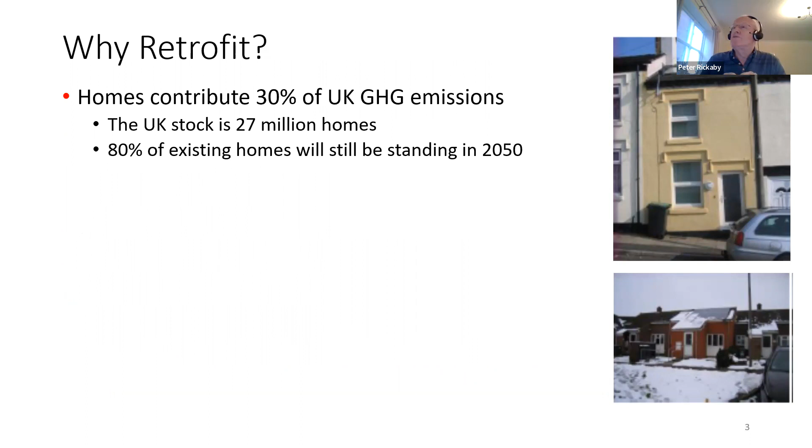But why retrofit? Well, homes contribute 30% of our greenhouse gas emissions in the UK. We've got, at the moment, about 27 million homes. And we're replacing that stock so slowly, about 0.5% per year since 1945, that actually 80% of existing homes will still be standing in 2050.

If we were to decide to electrify all our heat and hot water in all our 27 million homes, in order to provide zero carbon electricity from wind power, for example, or the equivalent from solar or nuclear, we would need 30 times as much offshore wind power or the equivalent as we have now. And it's taken us 30 years to get to where we are now. So multiplying that amount of wind power by 30 in another 30 years is probably not a realistic challenge.

But of course, we wouldn't just electrify heat. We'd use heat pumps, which upgrade heat by a factor, called the coefficient of performance, of 2.5. And that means that actually we'd only need 12 times as much offshore wind power if we used heat pumps to deliver our heat and hot water and removed all the fossil fuel, oil, coal, and gas appliances in our homes.

But actually, even 12 times as much as we've got now over the next less than 30 years is pretty challenging. And the government's heat and buildings strategy only looks at between 4 and 8 times as much. So there's a bit of a shortage there. What we do know, though, is that if we were to retrofit all our buildings, and particularly all our homes, we would only need 4 times as much wind power, which is exactly what the heat and buildings strategy specifies, multiplying the amount of wind power or equivalent renewables by 4 to cover our buildings, and by 4 again to cover electrification of our vehicles.

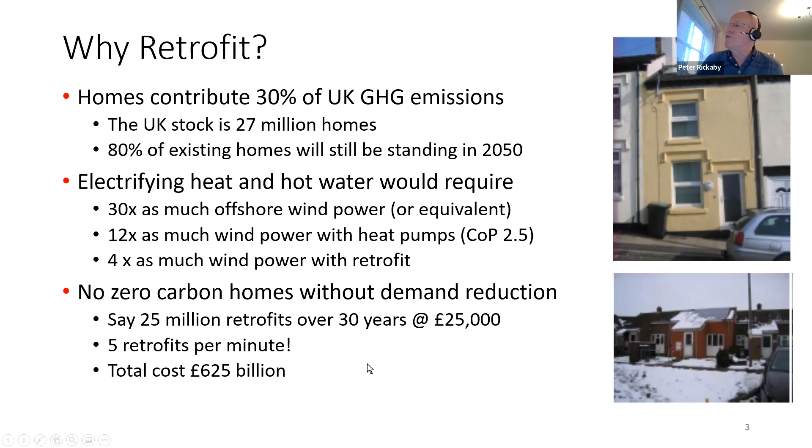But what we found is that one of the main places where retrofit goes wrong is at the corners, junctions, edges, and interfaces. And I like to explain that by saying that anybody can stick insulation on a wall. Even I can do that. But actually, it's where that wall connects to another wall, or a floor, or a roof, or a window, where we can get it wrong, where it's important to get the details right, get the continuity right, get the airtightness right, and so on.

It also goes wrong at the interfaces between the building fabric, the building envelope, and the building services. So is the heating capacity matched to the insulation level of the building? Is the ventilation system matched to the air permeability of the building? And so on. And then finally, and probably most importantly, retrofit goes wrong at the interface between the building services and the people in the building.

If the people who live there don't understand what's been done to the home and why, and what's the best way to use it, and what's the things not to do, if they don't understand what's being done for them, and that may well be an issue with things like heat pumps and ventilation systems, then we might as well not do it. So it's really important that we view our homes as energy systems consisting of the fabric of the building, the services of the building, and the occupants. And we need to be able to interact with all of those.

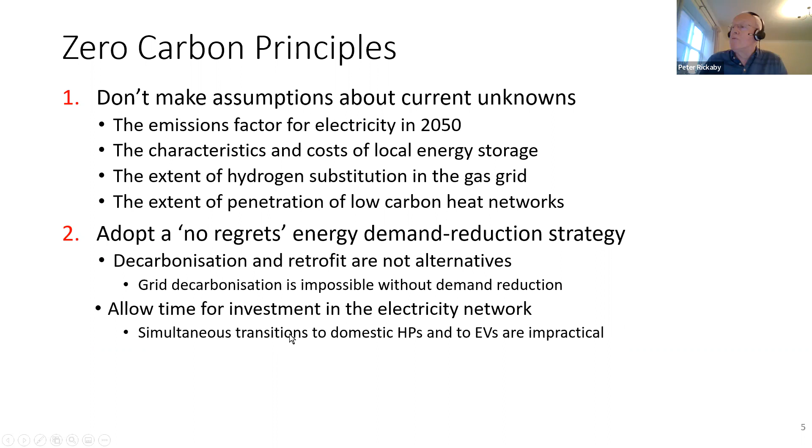So there are some zero carbon principles I wanted to suggest to you. Some more zero carbon principles. The third one is we should really be focusing first on fuel poverty and then on emissions reduction. We tried to work out and sort out fuel poverty in the 1990s. The Labour government made a very good hit at it, but they were overtaken by huge energy price increases in the 2000s. But actually, cold households don't care about emissions.

Some of you may feel the same way, actually. If you're cold at home, you want to be warm, and that probably takes priority over reducing your greenhouse gas or carbon dioxide emissions. So we need to make sure that we deal with the fuel poverty problem. And the events of the last few weeks in terms of energy prices, of course, don't help us with that very much.

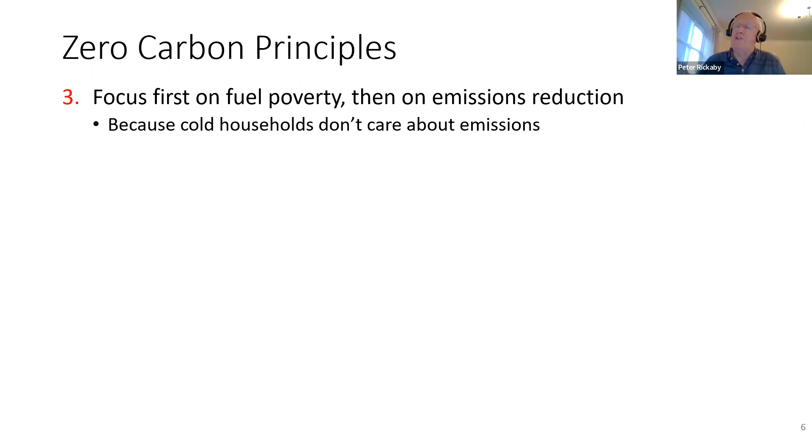So the fourth principle is adopt the fabric first approach. And the fabric first approach, which is long established in the industry, says, number one, improve the building fabric and the ventilation in order to reduce demand for heat and hot water and so on, but principally for heat. And then number two, improve and decarbonize the building services so that we can satisfy the residual demand or the remaining demand efficiently and in a low carbon way. And then three, finally, use renewable energy technologies to top up to zero carbon if the grid hasn't quite got there.

So fabric first is fabric first, and then building services, and then renewables in that order. And it makes sense, because if you insulate the building fabric, the capacity of the building services you need will be lower, and therefore they'll be cheaper. And renewables are actually quite expensive, so we want to use the minimum amount of those for doing our topping up, plus many of them rely on roof space, which we don't always have enough of to do it properly.

So what we should be doing is establishing a staged whole house improvement plan for every dwelling, so that we know how we're going to get to 2050 and which way to do it. Very few householders or landlords can afford to do their retrofit all at once. And so for the rest of us, it's going to be about stage 1, stage 2, stage 3 over the next 30 years, applying the fabric first approach and working at it in the way that one eats an elephant, in bite-sized chunks.

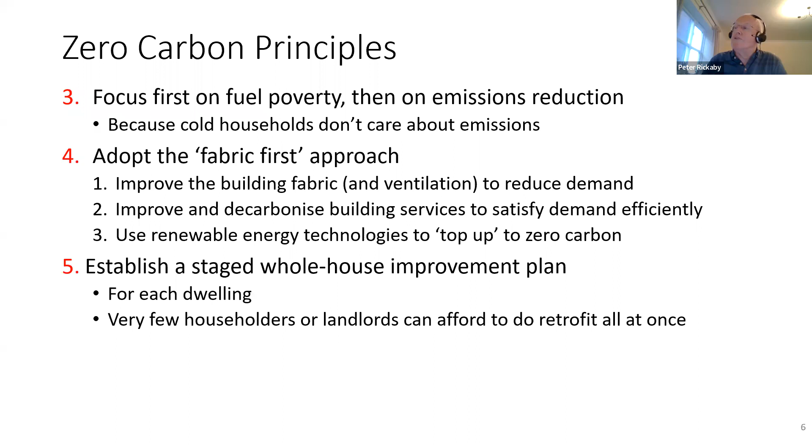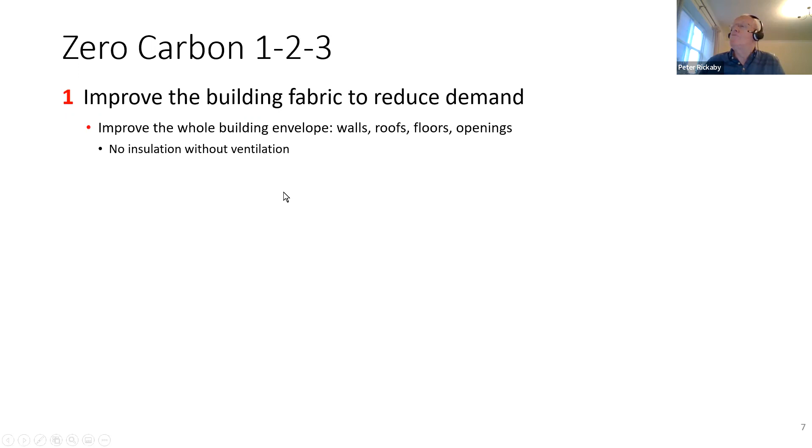So here's my zero carbon 1, 2, 3. Number 1, improve the building fabric. That means the whole building envelope, walls, roofs, floors, openings, and the maxim no insulation without ventilation. Aim to minimize or eliminate fuel poverty, and the current government target of Energy Performance Certificate Band C, which is SAP Energy Rating 69, if you know about SAP Energy Ratings, is actually inadequate. It doesn't deliver affordable warmth now, let alone later this year as the further fuel price rises kick in, and it certainly won't be doing that in 2030.

So we need to be looking more at what we call the top of EPC Band C, which is Standard Assessment Procedure, or SAP 80. We probably ought to be looking at much more challenging standards like the Passive House EnerPHit standards for our retrofit, which deliver very high standards of comfort and very low energy use.

But as you well know, in Hope Valley, there are some, if not many, traditionally constructed homes that cannot be adequately insulated. Quite often, we wouldn't want to put external wall insulation on the outside. We may not have the space inside for internal wall insulation. We may not be able to do roof-mounted things like solar PV or solar thermal, and it may not be appropriate to put a heat pump on the building. There are all sorts of considerations around construction, vapor permeability, architecture, aesthetics, appearance, and so on, and moisture management, which mean that traditionally constructed homes are very challenging to retrofit.

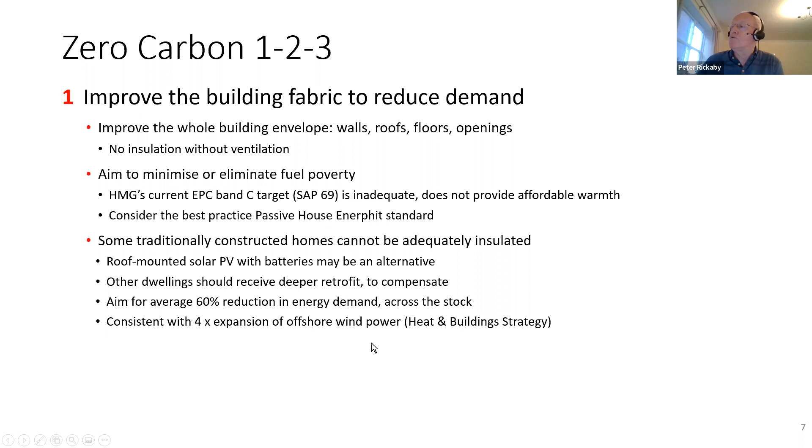But where there are dwellings that we can't adequately insulate, we may have to do deeper retrofit to other dwellings to compensate for not getting there in the case of the traditionally constructed ones. And it's very difficult because zero carbon means zero carbon, which means zero carbon everywhere. There's not really an opportunity to offset. We probably should be aiming for an average 60% reduction in energy demand across our housing stock. So if every house on average achieved a 60% reduction in demand, we would get away with our 4 times expansion of offshore wind power that's proposed in the heat and buildings strategy.

Number 2, improve the building services and controls. As I said, that means focusing on heating, hot water and cooking. We will already have done ventilation in stage 1, and we've already done lighting, which has been driven by the EU standards. And we're mostly, I hope, all now lighting our homes with LEDs throughout. We need to be removing fossil fuels, and that means for heating, hot water and cooking in particular, probably in most cases, individual air source heat pumps.

I think that the heat pumps will get smaller and quieter and cheaper and more reliable and more efficient, but don't quote me on that, but that's what usually happens when we go for new technologies at volume and at scale. So I think the heat pumps we'll have in 20 years will be much better than the ones we have now. That might be a clue to working on your insulation in the meantime and coming back to the heat pumps later.

Where we have blocks and small estates, communal ground source heat pumps are probably a better option. They're much more efficient, they're much less intrusive, they're quieter, all those kind of things. But if we're in some urban areas, we may have low carbon heat networks to connect to. And indeed, I believe that if we do have low carbon heat networks in urban areas, it'll become mandatory to connect to them when we build new dwellings or when we do retrofit.

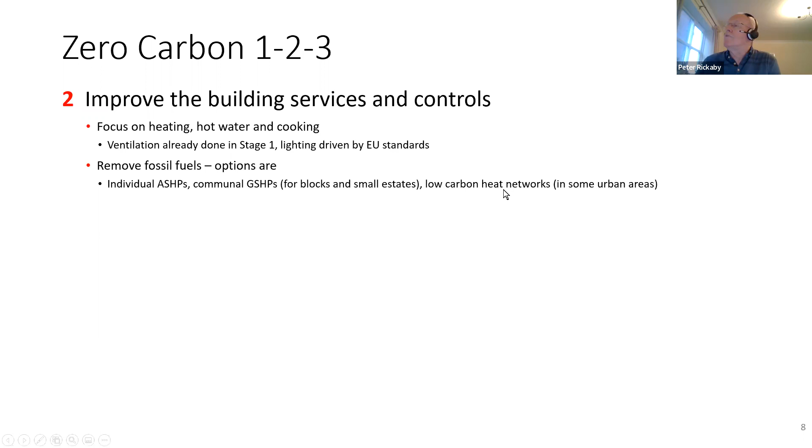So what we're trying to do in this number 2 stage here is get dwellings what I would call zero carbon ready, because the grid won't be decarbonised until 2050. So we can get it to a point where it could be zero carbon by 2050 if all goes to plan. And then number 3 of the 1, 2, 3 is start using local renewable energy to achieve zero carbon. And this is probably more likely to be something that you can do in Hope Valley.

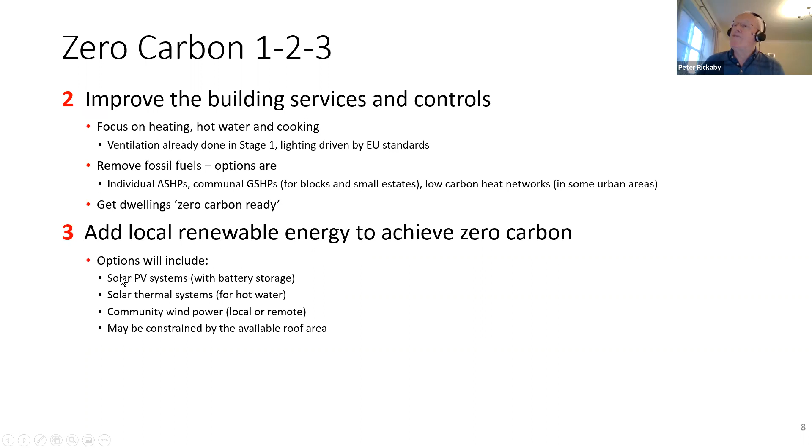Options will include solar PV systems, probably with battery storage. Solar PV doesn't have to be on every roof. It could be on solar farms or on hillsides. The battery storage doesn't have to be in every home. It could be shared locally. It could be water storage. We should be looking at solar thermal systems.

Once we've retrofitted and insulated our homes and made them quite well insulated, then the biggest thermal load in our homes will be the hot water, not the space heating. And from solar thermal systems, roof-mounted solar panels to make hot water, we can get about half the annual demand, albeit mostly in summer. But nevertheless, why would we turn down half of our annual demand for hot water for free, except for the capital cost, and with no carbon involved? So solar thermal definitely has a role to play.

And I think we need to be thinking about keeping some space on our roofs for solar thermal alongside the solar PV. And there are now solar panel companies, one called Viridian Solar, for instance, up in North Cambridgeshire, who make panels that look the same, but some of them are solar PV and some of them are solar thermal. So you can mix and match across your roof without making it look messy.

And then, of course, there's community wind power. And community wind power is the only way to do wind power. Small-scale wind power is hugely inefficient, but community wind power is very common in many parts of Europe. You can do it locally in your village or shared between villages. You can do it remotely. Wind power doesn't have to be in your village. It can be in Wales or in the Irish Sea or wherever it wants to be, provided the output is hypothecated to you as the user.

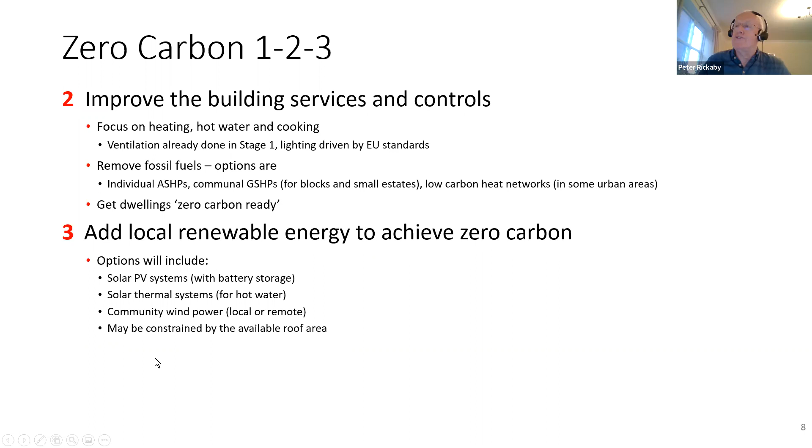When you do use local renewables, you may be constrained by the available roof area. So one of the earliest analyses you need to do is, well, how much roof have I got? How much of it is shaded? How much is it well oriented? What amount of energy might I realistically get off the roof, either as solar electricity or as hot water?

So that brings me to Each Home Counts. A big review, some of you may have heard of it, others perhaps not. It was brought about by a series of disasters in retrofit, which culminated actually after the review at Grenfell. But before that, there were many dozens, if not thousands of places where really poor quality retrofit was being done, mostly with government money or government promoted schemes. And there were so many complaints and so many problems, it soon became apparent that bad retrofit was worse than no retrofit in terms of how it left people's houses.

And so we had this review, an independent review of consumer advice, protection, standards and enforcement for energy efficiency and renewable energy. This was a review sponsored by 2 government departments, led by Peter Bonfield of BRE, had multiple work streams, and there were hundreds of people in the industry and around it who gave up 2 years of their time in many cases to contribute to those work streams and undertake the review. There were 27 recommendations published in December 2016. I'm not going to go through them all because I'm mostly interested in quality and standards, but these are the main headings of the recommendations, and they pretty much match the work streams actually.

And then implementation's been going on ever since. You may think that Each Home Counts disappeared without a trace, but implementation has been coordinated by a cross-industry implementation board, which sat for 2 years. BEIS has supported it with more than £3 million so far. And slowly, we've been changing things. And I have to say, in some cases with great enthusiasm from the industry, and in other cases with extremely negative pushback from the industry, many sectors of which wish to continue doing things the way they always did and making people's homes worse, not better.

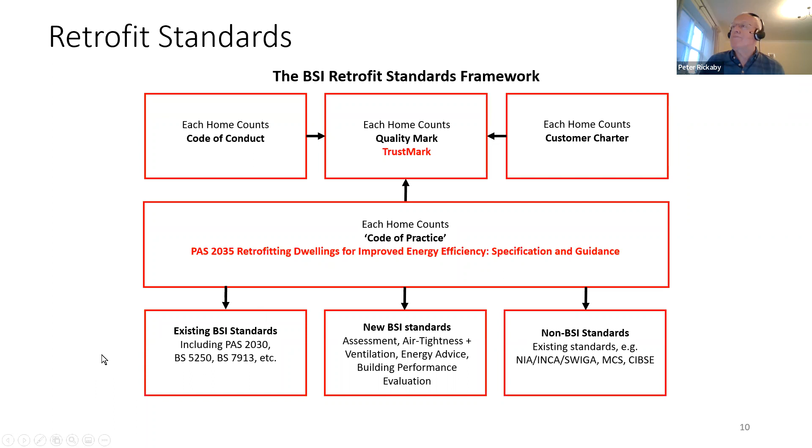At the same time, there is appointment of a retrofit coordinator. Every project has to have a retrofit coordinator, and we've spent the last 3 years training retrofit coordinators as fast as we can to get a good cadre of them out there. But we also have a retrofit assessor, a retrofit designer, and a retrofit evaluator in the process, all of whom have roles and minimum professional qualifications.

Because one of the objectives of PAS 2035 was to re-professionalize retrofit after the government removed all the professionals and gave the whole job to untrained installers around 2010 at the inception of the Green Deal. So we're trying to put the professionals back.

After the risk assessment comes a whole dwelling assessment, including an assessment of existing ventilation, and if it's traditionally constructed or protected, a significance assessment. That whole dwelling assessment deals with the context, both geographical and legal, the condition of the building, the occupancy of the building, the energy efficiency of the building, the ventilation of the building, and its architectural historical significance.

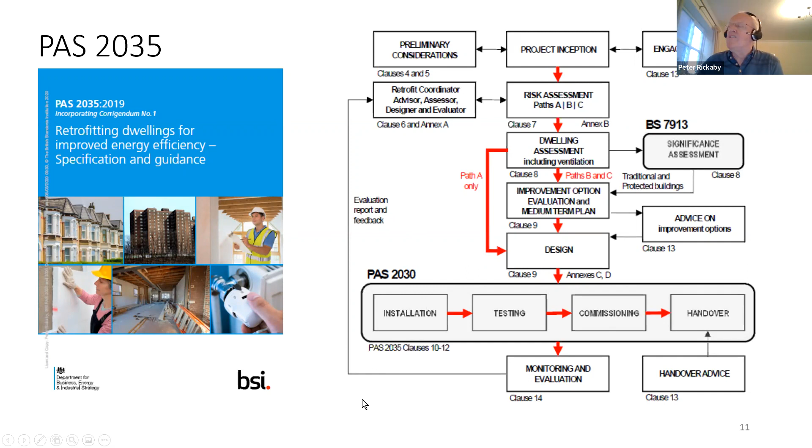If the answers are good, then the project complies with PAS 2035, and there's a feedback report that goes back to the team. If the answers are not what are expected, in other words, the intended outcomes have not been achieved, or there have been unintended consequences, the evaluation process is escalatory, and there are stages whereby the problems are investigated and remediated as required. So it's a complicated process, but not that complicated. It's the rocket science thing again.

So to kind of summarize PAS 2035, which is probably going to be with us for a while now, and we're just about to update it this year. We have a risk assessment, which determines the path through the PAS. We have a retrofit coordinator for every project. And we have professional qualifications required for the retrofit coordinator and for the other roles, depending on the risk path. We have requirements for design, which again depend on the risk path, but include an improvement option evaluation and a medium-term plan. We have additional requirements for traditionally constructed and protected buildings, where things like moisture risks are more important and where planning issues and heritage issues are more important.

We have requirements to assess the existing ventilation and upgrade it if it's inadequate or will become inadequate because of the retrofit. We have an installation process that must comply with PAS 2030, and PAS 2030 requires installers to have certified competence. And then finally, we have an evaluation process to confirm that the agreed outcomes have been achieved and to investigate and put right any discrepancies.

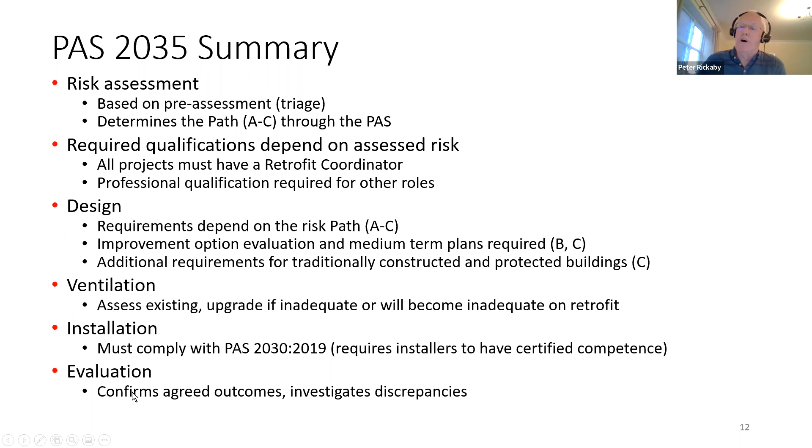So PAS 2035 is quite a challenging document. It's been the subject of much argument in both directions in the industry. It's still going on, and it probably will for a long time. Lots of people pushing back, lots of other people saying we need to strengthen this thing and protect our homes and our occupants' health more even than we're doing at the moment.

The Each Home Counts Review led to the establishment of the Trustmark quality mark for retrofit, and all government promoted or government funded retrofit programs are Trustmarked. Trustmark has two arms to it. It has a compliance arm, which does audits of designs and assessments and improvement option evaluations and medium-term plans, and inspections of work on site, and enforcement, and deals with remediation and redress when things go wrong. And Trustmark also has a data warehouse, an online data warehouse, into which records of all PAS 2035 compliant retrofit projects are uploaded.

But the main point from Trustmark is that projects must comply with PAS 2035, the one we've just been through. And PAS 2035, through the framework, calls in lots of other standards, so that we're bringing all the latest, most up-to-date quality standards for retrofit to bear on the project. And then for installation, we have PAS 2030, which deals with testing, commissioning, and handover. Or in the case of renewable technologies, we have the Microgeneration Certification Scheme, or MCS standards, and records of all that and of the designs go into the Trustmark data warehouse so that Trustmark can apply risk-based procedures for identifying what needs inspection, auditing, and so on.